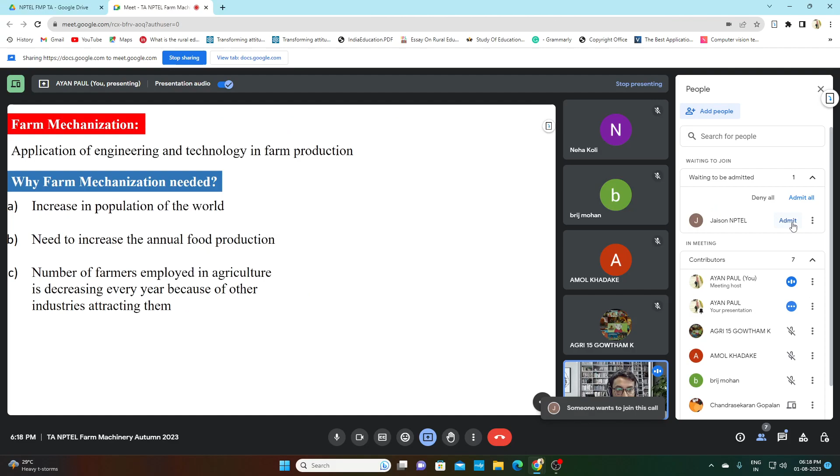So starting with this, there is an increase in population of the world. If you have read the week lectures, if I compare from 1951 to 2023, our population has increased about four folds. To feed this population, what we need is to increase our annual food production. More the people, more food we require to feed them.

So for that we mainly require farm mechanization. But you can say, if we require more food, we can still work it out without farm mechanization. So the answer to this is, you have seen there is an increase in population of the world, but if we compare the number of farmers employed in agriculture, the farmers are decreasing every year because other industries are attracting them.

Because agriculture tasks without any mechanization are very expensive in terms of hard work. This is a very hard working task without mechanization. So that is why we require farm mechanization. Therefore there is a need to increase crop production to feed the current population of the country, and for this we mainly require mechanization.

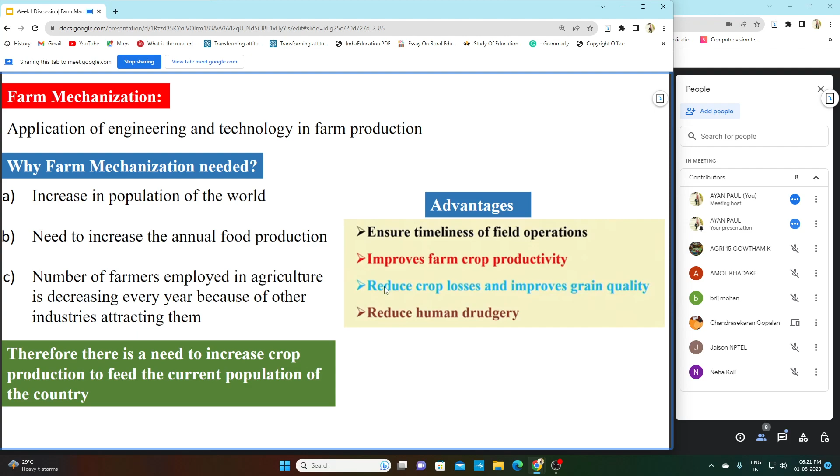Fourth is reduce human drudgery. As I was saying earlier, the number of farmers employed is decreasing. Why decreasing? Because it is very hard work on a farm. So to reduce human drudgery or tiredness, farm mechanization is very advantageous.

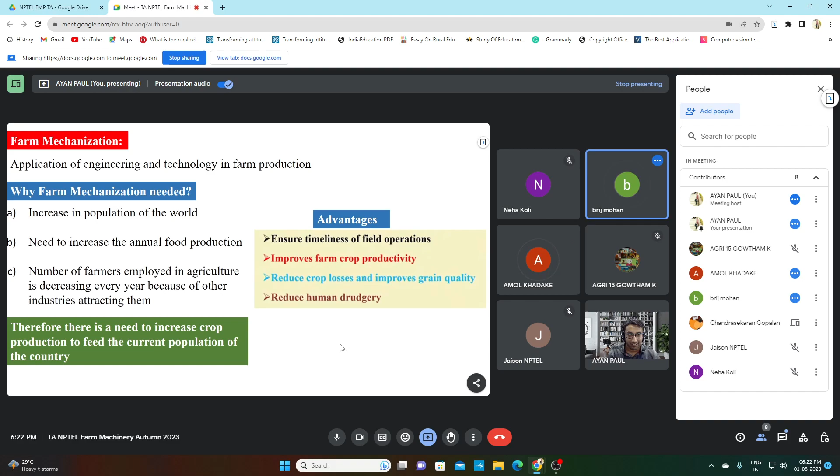So is this slide clear to you all? Hello. Yes, sir. Okay. Any query from this slide particularly? Any simple queries you have? Anything in mind? One thing I want to request is please make this session interactive. If you interact with me, then only I can understand your doubts well. Okay. Yeah, okay sir, clear, yes. Okay, very nice.

So let's move on to the second slide: farm power availability and grain productivity. This chart's x-axis shows the years and y-axis shows the data. There are two types of data: the blue line indicates power availability, and the orange line indicates productivity. You can see clearly that whenever the blue line takes an upward trend, the orange line also takes an upward trend. That clearly means there is a positive correlation between power availability, indicated by the blue line, and productivity, indicated by the orange line.

For more information, I want to draw your attention to the fact that in 2018-19 our farm power availability was 2.49 kilowatt per hectare, and it is expected to be 4 kilowatt per hectare by 2030. Now one main question I want to ask: can anyone tell me how this power availability is calculated? Can anyone unmute and try to tell how this power availability is calculated?

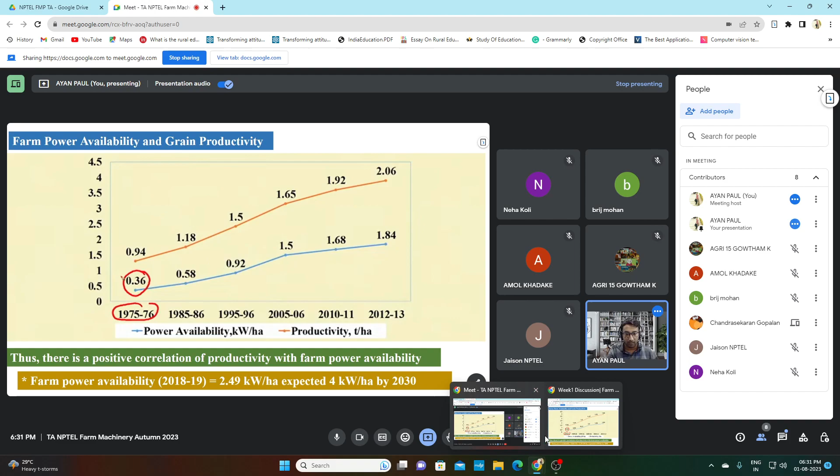So let me go back to my slide. Okay, 1 minute.

Okay. So what are the different farm machinery operations? This is a very important slide. In farm machinery, generally we break our farm machinery operations into 4 parts. One is land development, tillage and seedbed preparation. This is the primary operation, the first operation of our farm machinery, right?

Second is sowing and planting, meaning once we develop the field, our next task is to sow the seed or plant the seed. There's a difference between sowing and planting that I will tell you in the subsequent classes. Third is weeding, intercultivation and plant protection. When our plant is growing, we need to protect it from competition by weeds grown nearby, or from pests, insects, etc. This is known as the plant protection operation.

And the fourth one is the harvesting operation. When our fruits and cereal crops have attained the maturity stage, or physiological maturity stage, we do the harvesting operation. And after harvesting, we do the threshing operation to separate our grains from any husk or grasses, etc.

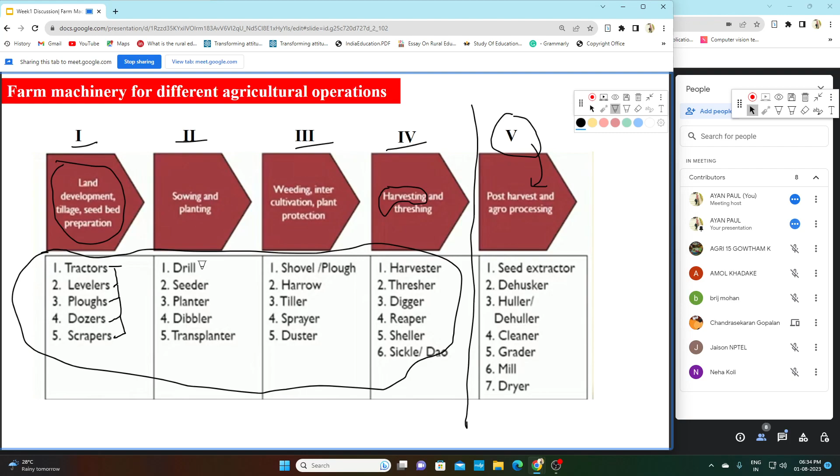For sowing and planting we use the seed drill, seeder, planter, dibbler, and transplanter. A seed drill is a machine used to sow the seeds. A planter is also used to sow seeds, but the difference is that with a seed drill we do not maintain plant to plant distance, while with a planter we accurately maintain plant to plant distance. A dibbler is a manual instrument used for precise planting, more precise than a planter.

And transplanter: for some crops we first raise plants in a nursery, and from the nursery we have to transplant them to the main field. For this the transplanter is used.

For plant protection we use a shovel or plow, a harrow, tiller, sprayer and duster. The sprayer is used for liquid application, while the duster is used for solid application, like powder or granular particles. This is the main difference between sprayer and duster.

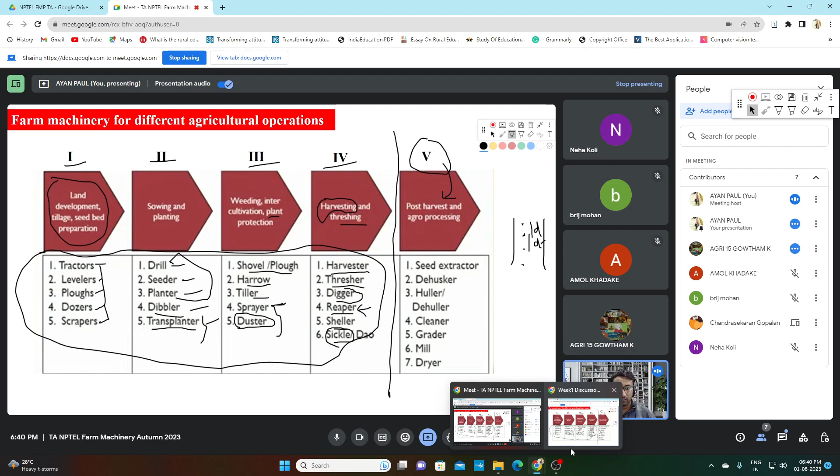This is one of the most important slides. I want to draw your attention to the four farm machinery operations. That will be asked to you again and again in any interview or any kind of thing. So please keep in mind these four operations of farm machinery. Okay, so let me go to the next slide.

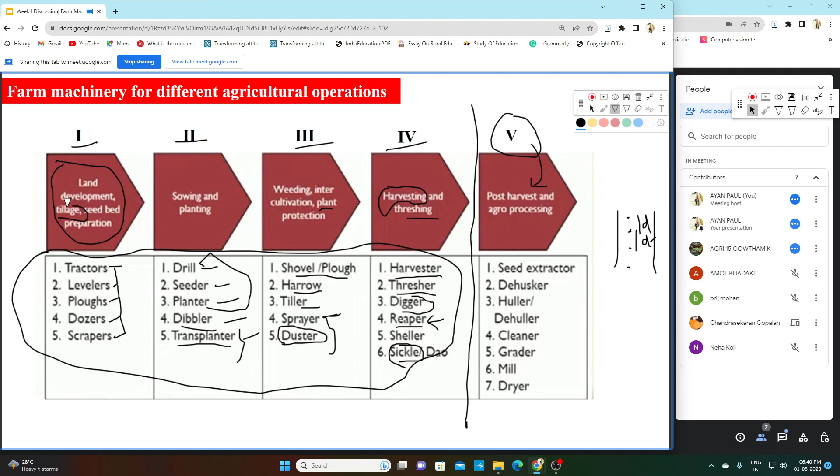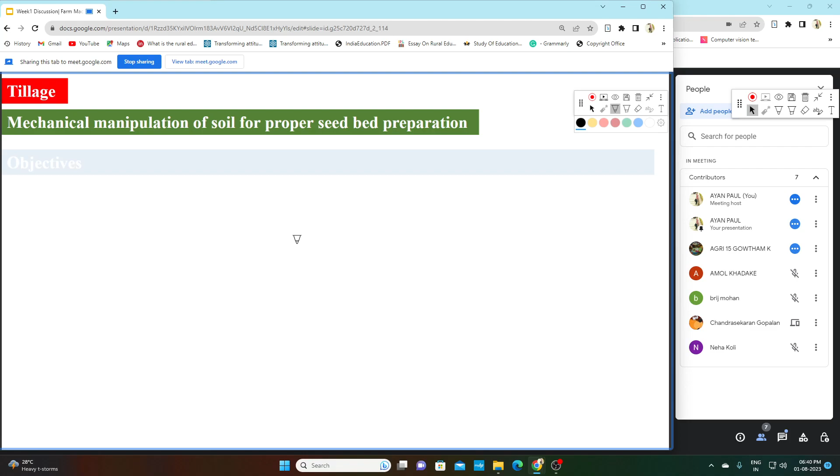So our first farm machinery operation is land development, or seed bed preparation, and we start with tillage. So what is tillage? Tillage is mechanical manipulation of soil for proper seed bed preparation. Before planting your seed, you have to mechanically manipulate the soil. That operation is known as tillage. What are the objectives of tillage? Basically, we do tillage to develop a desirable soil structure for seed bed or root bed.

Any barren land, if kept for many days, will develop a hard pan over it. When the hard pan is developed, without tillage, if you sow the seed, the root will not be able to penetrate well into the soil. So to open our soil a bit, we do tillage. Second is to control weeds or remove unwanted crop plants. Before tillage there can be unwanted crops lying in your field, so to remove them we do tillage.

Third is to manage plant residue. If any plant residue is left, we do tillage to control it. With tillage, the plant residue goes into the soil, and when we mix the soil, the nutrition value of the soil also increases. Then, to minimize soil erosion by following contour tillage, listing and proper placement of trash.

Now what happens is, agricultural land is very prone to soil erosion. Whenever the rain comes, it takes soil with it. So to manage that, we do seed bed preparation in such a way that it controls soil erosion. And the last one is to incorporate and mix fertilizer, pesticide or soil amendments into the soil.

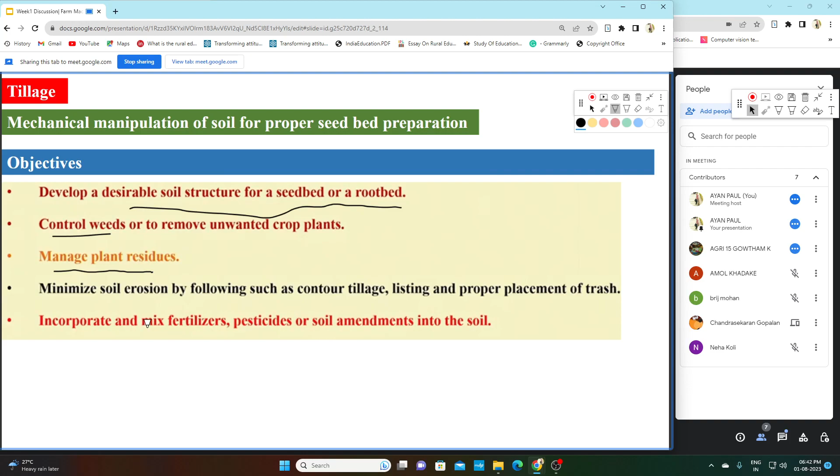If our soil is already too acidic or too basic, we have to add some fertilizers or amendments, and to mix the fertilizer properly with soil, tillage is very helpful. Okay, so this is the thing. Is this slide clear?

Tillage? Yes, sir. Okay. Any doubt regarding tillage?

So one question was there. Yes. About this topsoil: when we till, the topsoil goes down. What is required for the plant? Is topsoil required, or is the deep soil required? Yeah, both required. Topsoil also required.

Generally, for planting we do 15 to 20 centimeters, basically for most crops. Okay, it is 15 to 20 centimeters. So I think both soils are required, right? Topsoil and also the soil below that.

So what we do in tillage is destroy the hard pan that is created. We basically aerate the soil. When we do the digging operation or some other operation, that hard pan will be destroyed, and our roots will properly penetrate well into the soil. Okay.

Okay, sir. Okay. Any other doubt? Okay. So let me move.

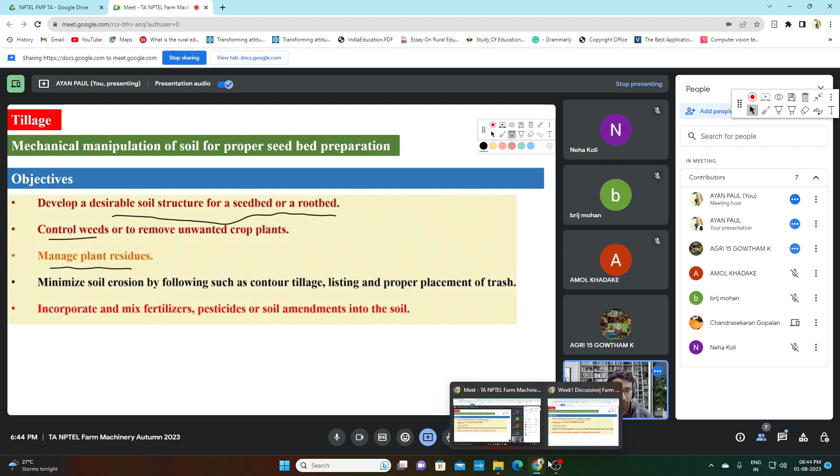Okay, so now what are the types of tillage? Basically there are two types of tillage. One is primary tillage and the other is secondary tillage. There is another type of tillage called conservation tillage. So let's see what the different types of tillage mean. So first is primary tillage.

Primary tillage constitutes the initial major soil working operation. So this is the main type of tillage. It is normally designed to reduce soil strength, cover plant residues, and rearrange aggregates. Whatever definition you have heard, this is the main type of tillage, primary tillage, the initial major soil working operation.

So these are the different tillage equipment. You can see this is a moldboard plow, this is a reversible moldboard plow, this is a disc plow, this is a chisel plow, and this is a subsoiler. Okay.

So is my voice audible? Yes, sir. Okay.

So the next type of tillage is secondary tillage. Secondary tillage is to create refined soil conditions following primary tillage. After primary tillage, we need our soil to be properly leveled. Without leveling, one seed might be at one depth and another seed at a different depth. That will basically affect the yield quality. So to prevent that, we properly refine the soil, or properly level the soil.

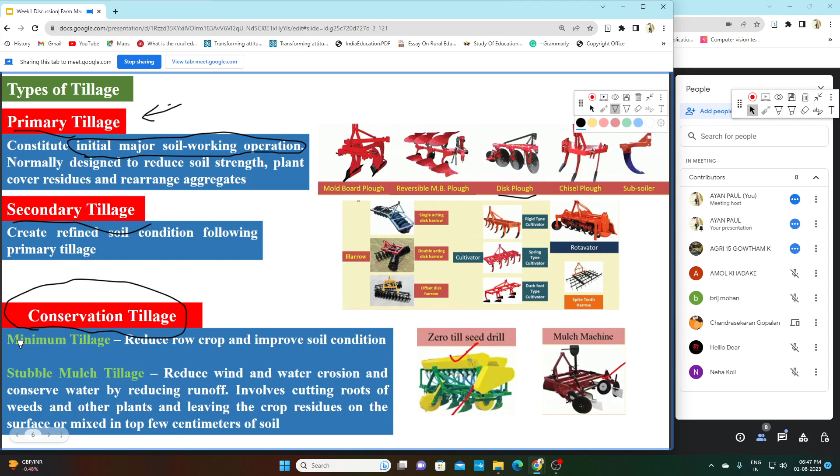And the third type of tillage is a special type known as conservation tillage. What if our seed bed is already in a good condition? There, the type of tillage we require is minimum tillage. In minimum tillage, we reduce row crop operations and improve soil conditions. So if our soil is already in a good condition, we do not require primary or secondary tillage. We can go with conservation tillage.

There is another type of tillage known as stubble mulch tillage. I already told you there might be a problem of wind erosion or water erosion, and the soil might be taken by wind or water. So to protect this, we do stubble mulch tillage. The plants that were already in the field, we basically mix those plants into the top few centimeters of soil, so that the strength of the soil increases. So this is the purpose of conservation tillage.

You can see these are the two popular equipment used for conservation tillage. One is the zero till seed drill, and the other is the mulch machine. The zero till seed drill is basically used for minimum tillage, and the mulch machine mixes the mulch, or the crop residues already in the soil, with the soil. This is the equipment for stubble mulch tillage. So is the slide clear to all of you? Primary tillage, secondary tillage, and conservation tillage.

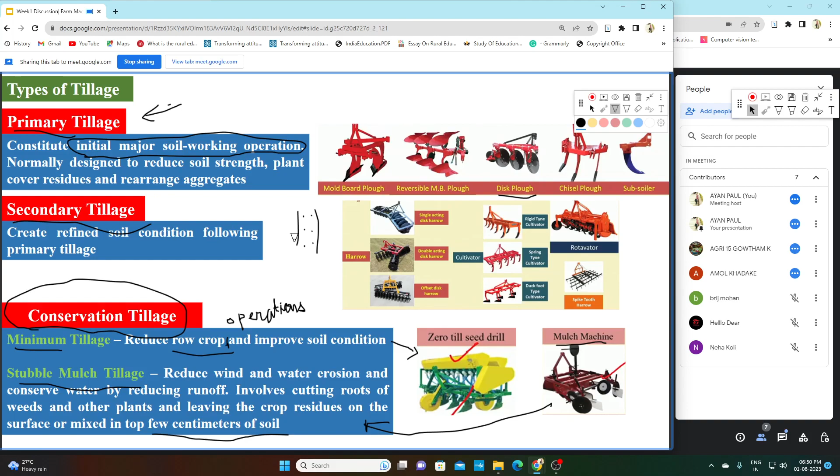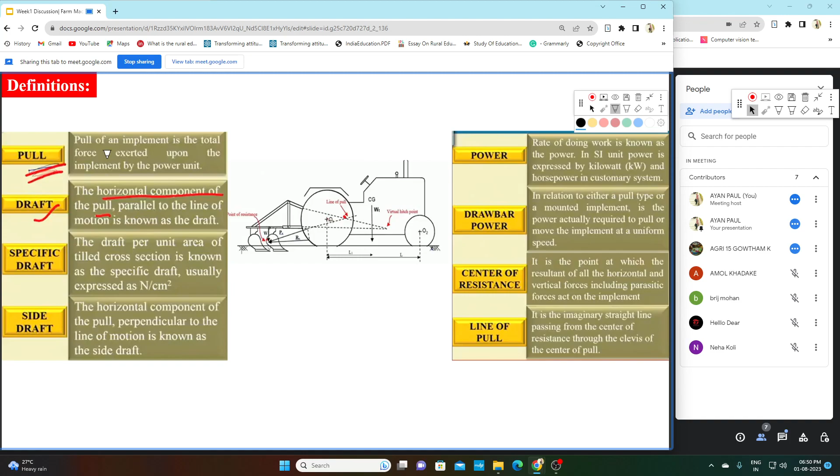Okay, so let me move to the next slide. So yeah, for any farm machinery operation, what you require is a tractor, okay. So there are some definitions related to implements and tractors. So first is pull. You can see this first part is the tractor, and this second part is your implement, okay. First part is tractor, second part is implement.

So what is this pull of an implement? It is the total force exerted upon the implement by the power unit or the tractor, okay. So the force that is exerted by this power unit to pull this implement is known as pull. In farm machinery operation, we will call it pull. Now what is draft? Draft is the horizontal component of pull parallel to the line of motion.

So what happens is, this may be your tractor, okay. It is not necessary that your implement is always in a straight position. Your implement can be tilted to some position also. So this force exerted is known as pull. So what is draft? If we take the component in a horizontal direction, that is known as draft. This is the pull, and this is the draft.

Now specific draft: draft per unit tilled cross section area. So whenever the implement is pulled, it has some draft, okay. So if we divide the draft by the tilled cross section area, we will get the specific draft. Now what is side draft?

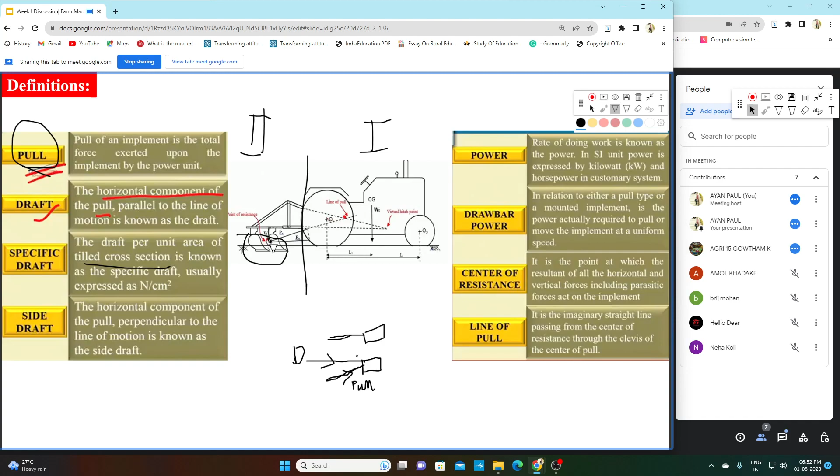Which area? Yeah, area. So you can see this is your implement, a moldboard implement. So when the moldboard is pulled, there will be some tillage, and this is known as tilled soil. This is one strip, and this is the second strip. Two tools, so two strips. So this is the tilled soil.

So when you pull your equipment, it will be tilled in the horizontal direction. I am showing it in the vertical direction, but it is actually in the horizontal direction. So when you divide this draft by this tilled area, that is known as specific draft. Okay. Clear, sir, clear. Thank you.

Now what is side draft? In the case of draft, I have told you it is the horizontal component of the pull. But see, there are two planes: one is the vertical plane and another is the horizontal plane. In the horizontal plane also, it may not be in a straight line with the tractor. So in the horizontal plane, it can be somewhere here also.

So side draft is perpendicular to the line of motion. If this is your pull, denoted by P, taking this pull in the horizontal plane, this is your draft. The side draft is perpendicular; this is your side draft, SD. So this is your pull, this is your draft, and this is your side draft. The force that is perpendicular to this draft is known as side draft. Is this clear? What is pull, what is draft, what is side draft?

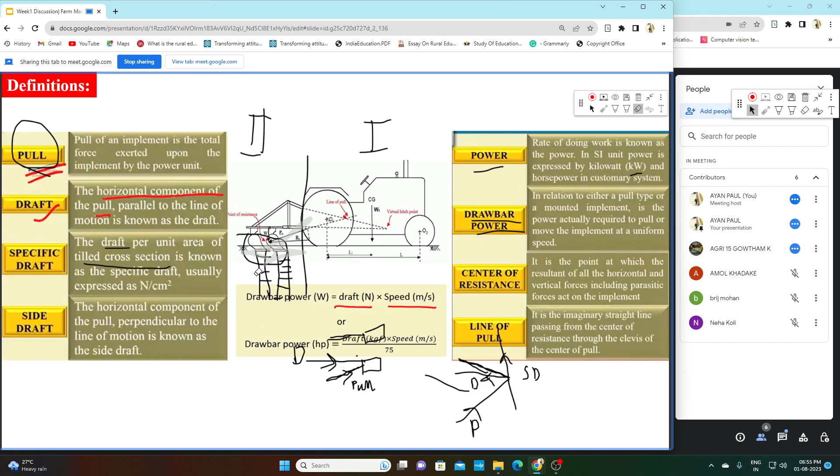Yes, sir. Okay. Now power, everyone knows what power is. It is the rate of doing work, and I have already told you its unit is kilowatt. And regarding drawbar power, let me erase it. So drawbar power is nothing but draft into the speed. We know that power is equal to force into velocity. So drawbar power will be equal to the draft of the implement into the speed at which the implement is traveling.

Now center of resistance. It is the point at which the resultant of horizontal and vertical forces, including parasitic forces, acts on the implement. There are two kinds of forces. One is useful force, that is required to cut the soil or do the useful operation. And there is parasitic force, like friction or any such forces that come due to our useful force; that is known as parasitic force.

So center of resistance is the point of resultant of this horizontal and vertical forces, including the useful as well as this parasitic force. Okay, and last is line of pull. It is the imaginary straight line passing from the center of resistance to the clevis of the center of pull. So you can see in the diagram, this is the line of pull.

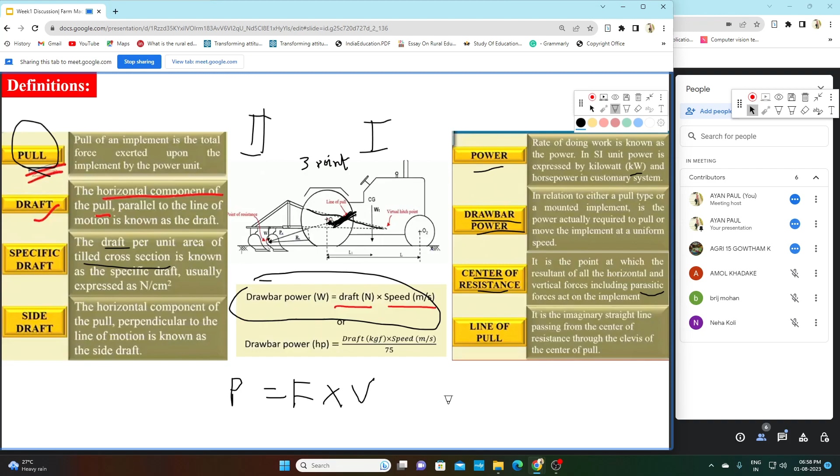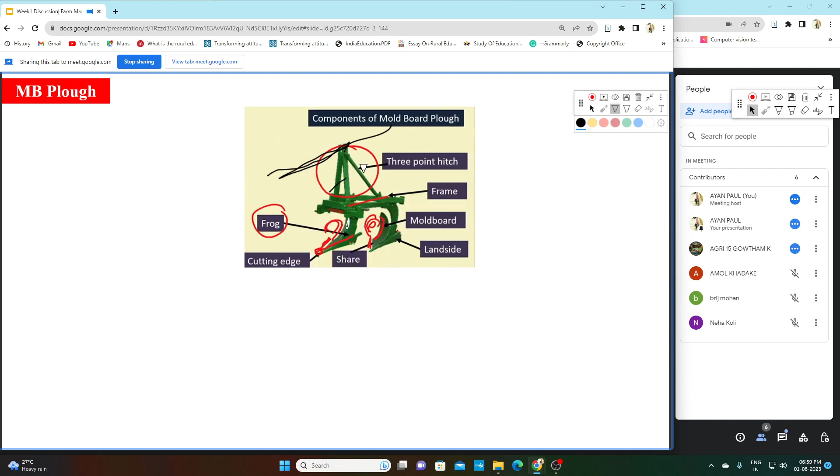Okay. So let me move to this MB plow. So this is an MB plow, mold board plow. These are the different components of this MB plow. So yeah, 3 point hitch. Someone was telling only this top link, but no, the top link as well as these two bottom links are also connected in a 3 point hitch. So that is why the line of the pull is coming like this. That is the pull of the tractor, there will be a center of resistance here, and this is your line of pull.

So this is a 3 point hitch, this is a frame, these are the mold board that is used for this plowing operation. This is a landside that will take the side thrust of the mold board, and in the mold board there is a share and there is a cutting edge. So the cutting edge first enters the soil, and what is the purpose of share? The share turns the soil. Plowing is the initial soil working operation. So to break that hard pan, we do tillage in such a way that the soil overturns. This is also known as pulverizing operation. So the soil overturns, and that function is done by share.

And frog is an element that connects this mold board with this frame and hinge. This is the function of the frog. So this is mold board plow, and function is cutting the furrow slice, then lifting the soil. The share does the lifting, the share also does the turning operation, and pulverizing the soil. Pulverizing the soil means breaking the hard clods, to decrease the diameter of the soil clods, in order to have a better penetration in the soil. So this MB plow also does the pulverizing of the soil.

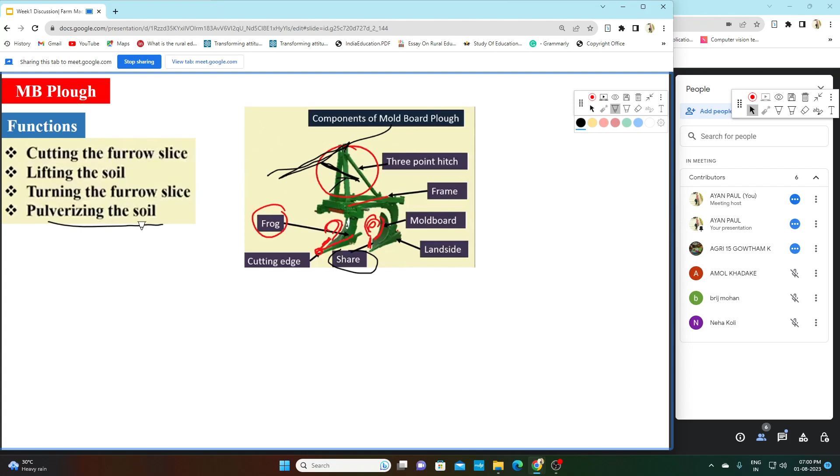Now types of mold board. This type of mold board you are seeing here is one way mold board plow. There is another type known as two-way mold board plow. Here you can see the turning operation is at one side. If the turning of the soil is on both sides, that is known as two-way mold board plow or reversible mold board plow.

Now there are different types of plow bottom used for different purposes. The general purpose bottom mold board plow is mainly used for a wide range of operations. But the sod or breaker type of mold board plow, you can see by the shape, is a long and low mold board. It is used to invert the furrow slice with a minimum breakup. So in this sod or breaker type of mold board plow, basically this turning operation will be more.

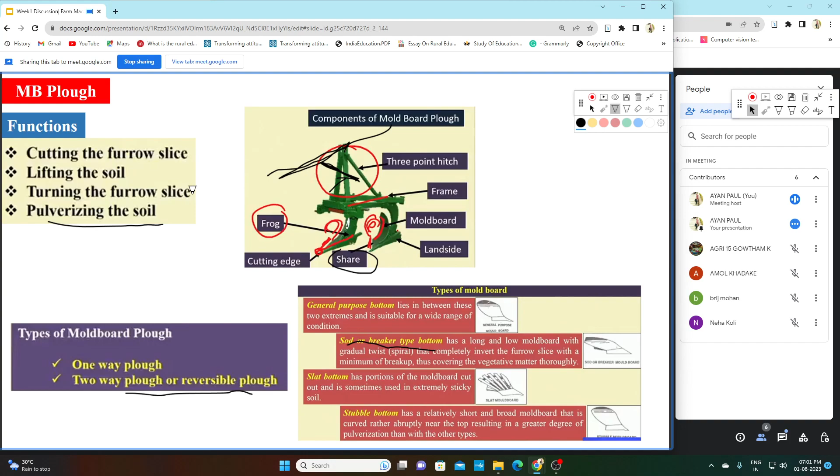This turning operation will be more, and there will be a decreased pulverizing operation. So this is the purpose of this type of bottom. Now this slat bottom has a portion of the moldboard cut and is sometimes used for extremely sticky soil. If the soil is very sticky and it is sticking to the moldboard plow, for that purpose we use this slat bottom moldboard plow.

Now the stubble bottom moldboard plow is, you can say, opposite to the sod bottom moldboard plow. It is a relatively short and broad moldboard plow, and it has a greater degree of pulverization than other types. So these two moldboards you should keep in mind for your exam or any interview purpose. One is the sod or breaker type of moldboard plow, and another is the stubble bottom. The sod does much more inversion than pulverization, and the stubble bottom does greater pulverization and lesser inversion.

Okay, so is this slide clear, the difference between the sod or breaker type of moldboard plow and the stubble bottom moldboard plow? Is this clear? Yes, sir. Okay, so again I am repeating what the moldboard plow does.

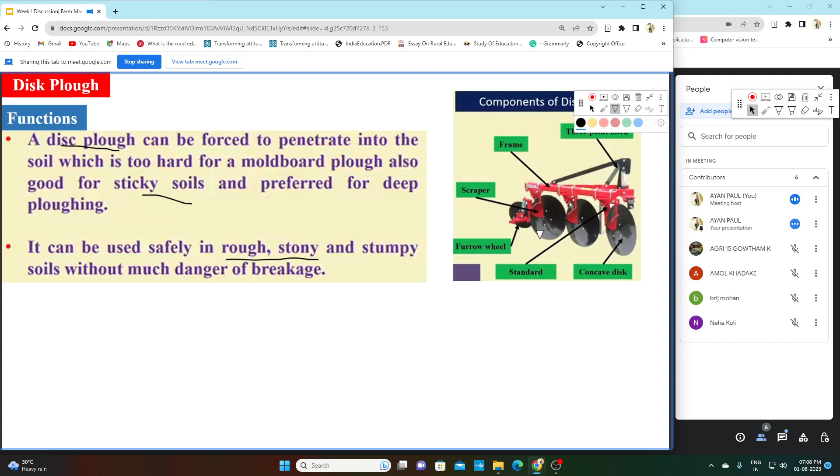Second, we can also use this in rough and stony soils, because the disc is connected by this standard, and there is some type of spring attached in this standard. So when we are operating in rough and stony soil, the shock absorbed by this type of implement is less. So this is the purpose that we move from moldboard plow to this disc plow.

Okay, now standard disc plow. As I have already told, this is the standard disc plow. For this standard disc plow there are two types of angle: one is disc angle and another is tilt angle. This is the direction of travel of the tractor, and the disc will be at a certain angle to the direction of travel. The angle between the direction of travel and the disc is known as disc angle. Another angle is known as tilt angle: with vertical, the disc is tilted to some angle, that is known as tilt angle.

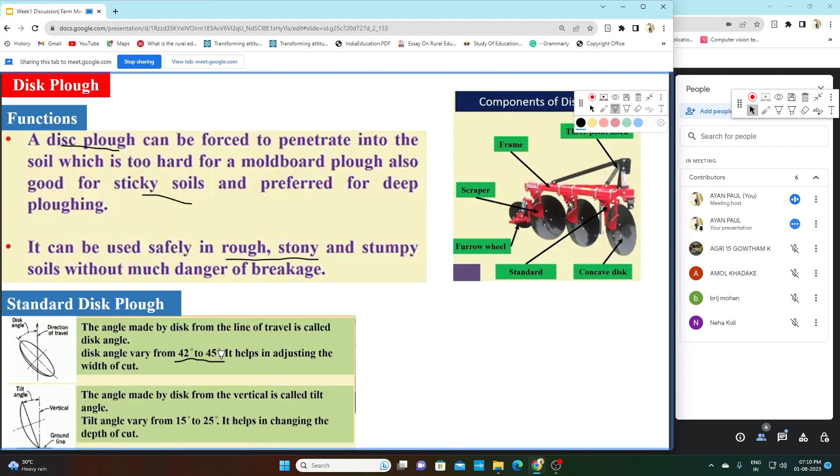So again I am repeating, in this standard disc plow, two types of angle we need to focus on. One is disc angle and the other is tilt angle. Disc angle is the angle that the disc is making with the direction of travel, and tilt angle is the angle that the disc is making with the vertical. This question is very common. Generally for disc plow, the disc angle varies from 42 to 45 degrees, whereas the tilt angle varies from 15 to 25 degrees.

So again I am repeating, there are two types of disc plow. One that I have already explained, that is standard disc plow. Second is vertical disc plow. In case of vertical disc plow, the tilt angle is 0 degrees, but in case of standard disc plow, the tilt angle is 15 to 25 degrees. Okay, so is this clear?

Yes, sir. But vertical disc plow is used in sandy soil areas, where the stickiness action does not come much into action. And second, where the force to penetrate the soil is less, there we use vertical disc plow. Okay, so any question in this slide?

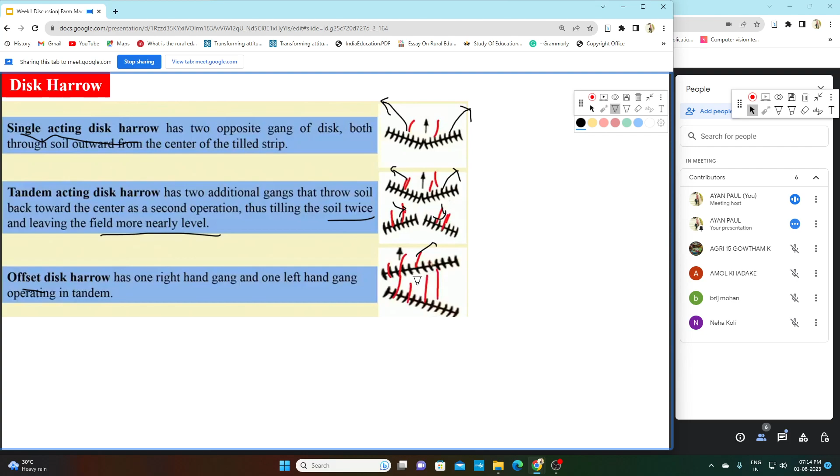The third type of disc harrow is known as offset disc harrow. This is also similar to the double acting disc harrow; the only difference is that in tandem disc harrow, for one set of gang action, we are using two gangs, but in offset disc harrow, for one set of action, we are using only one gang. One gang for throwing the soil outside, and the second gang for throwing the soil inwards. So these are the three types. So is this clear?

Hello, is this clear? Yes, sir.

Okay. So there is an angle that is used for this type of harrow, the gang angle. Sir, one doubt: what is the gang of discs? Yeah, gang of discs. You will understand this from this diagram. You can see these are the discs. These are the discs, you can see clearly, right? Okay, yeah, you can see the discs clearly.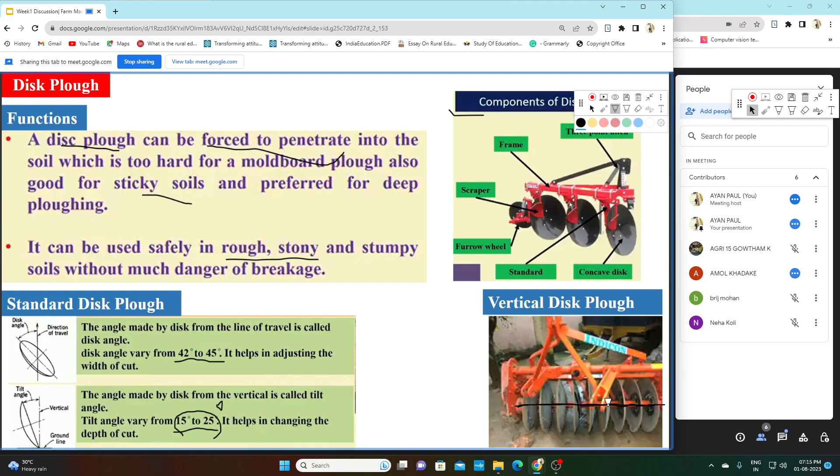The pipe, or the thing that is attaching all the discs, this red thing, that is attaching all the discs, that is known as the gang. Okay, so this is the thing. So the angle that the axis of the gang makes with the line perpendicular to the motion. You can see this is the gang angle for this disc. This is the gang angle, right?

And this is your direction of motion. Okay, so this angle, we can say alpha, this is your gang angle. The angle the gang is making with the line perpendicular to the direction of motion. So this is your direction of motion, and this is the perpendicular line to the direction of motion, and the angle that this gang is making with this perpendicular line is known as your gang angle. Okay, so is this clear? Is the gang angle clear?

Yes, sir. Okay. So you can see here also, in this diagram, this is your direction of motion, where it is hitched. And this is your perpendicular line, and the angle that the gang axis is making with the line perpendicular to the direction of motion is known as the gang angle. It is denoted by alpha, and normally the gang angle is between 30 to 35 degrees. Okay, is this clear?

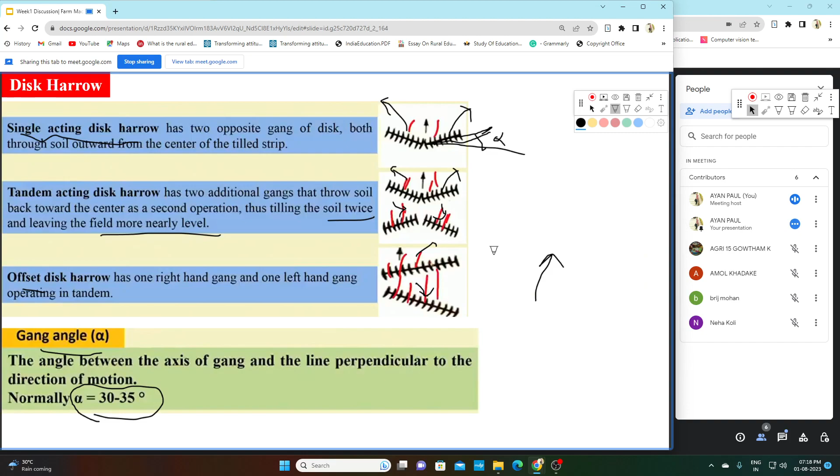The other equipment that I have shown, the disc harrow, the disc plow and the moldboard plow, are passive tillage equipment. Passive tillage equipment means your tractor is not directly giving power to the equipment for cutting. Your tractor is not directly giving power, so that is why this type of equipment is known as passive equipment.

But this equipment that I am discussing now, the rotavator, is an active tillage equipment. For these blades to be in motion, we require power directly from the tractor PTO. That is why this type of equipment is known as active tillage equipment. And this is the universal shaft. We connect this universal shaft with the tractor PTO, and the power goes from the tractor PTO to this universal shaft, and from this universal shaft there is a chain gear reduction.

Actually, the RPM of the tractor PTO is 540 RPM or 1000 RPM; these two types of RPM are there. This RPM is very high for these blades to rotate, so we have to do some reduction in speed. For this reduction in speed, we use this chain gear drive.

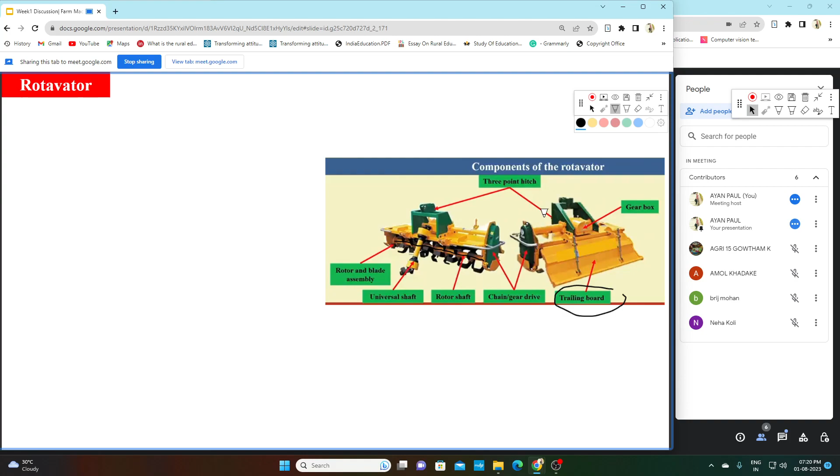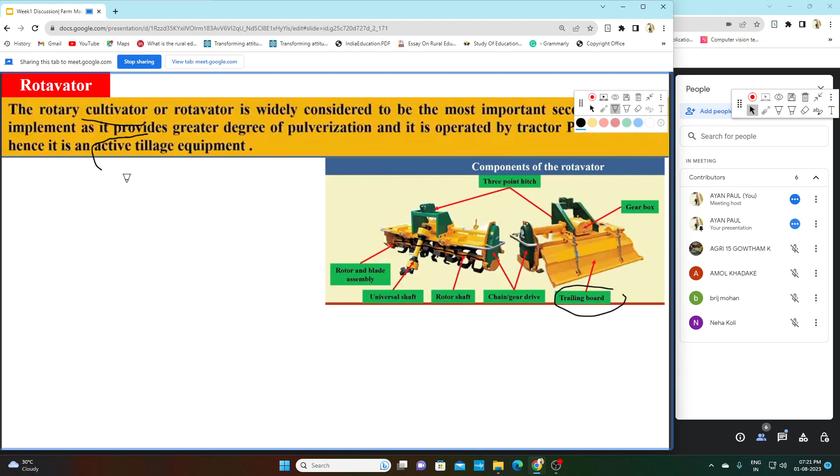Okay, so for the soil to be properly leveled, we use this trailing board. So these are the components of the rotavator. Rotavator is also known as rotary cultivator. It is widely considered the most important implement, as it provides a greater degree of pulverization. It is operated by tractor PTO. That is why it is called an active tillage implement. So that is what I told you first, that this is an active tillage equipment.

Now the question that always comes when we are discussing rotavator is the types of blades used for this rotavator. Basically there are three types of blades used for rotavator: L type blade, twisted blade, and straight blade. L type blade works well in trashy conditions, where there is more grass or more plant residue. It does more effective inversion operation, cutting weeds or turning soil, but it does not pulverize the soil much.

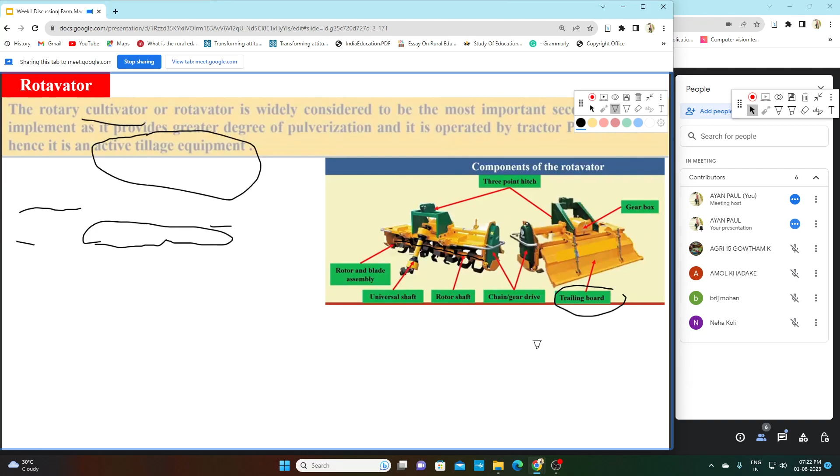Like in the case of the moldboard plow I explained, the sod or breaker type does the inversion operation well but not the pulverization. Similarly, the L type of blade does the inversion operation well, but does less pulverization.

Second is the twisted or curved blade. It is suitable where we require deep tillage, so there we use this twisted or curved blade. It is also suitable for orchards. In case of orchards, we generally require more depth to sow the seed, so we use this twisted blade.

Third is the straight blade. It is employed in mulchers, where we require more cutting operation, or where we want the weeds to go into the soil for conservation of moisture. Straight blade has very less depth of tillage, as well as very less pulverization. So this is the thing.

Any doubt in rotavator? I have one question: is there any drawback of rotavator? First, you need tractor PTO power, so that is the major drawback. Others do not require tractor PTO power. That is the only challenge of active tillage implements over passive tillage implements. But PTO is there in all tractors anyway, so there is no issue as such. But any drawback from the point of view of sowing? PTO is not required to run the tractor, right?

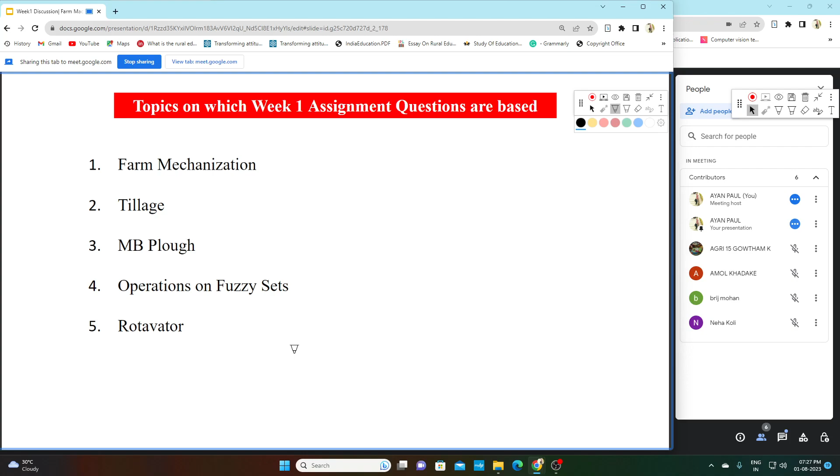So my request to everyone is to engage more. I will first display the question and if you know, you can answer in the chat section. If you don't know, you can write your guesses in the chat section. Okay, is that fine? Okay, sir.

Okay. So first question: the diameter in millimeter and speed in rpm of the PTO shaft having 21 splines are: option A, 30 millimeter and 540 rpm; B, 30 millimeter and 1000 rpm; C, 45 millimeter and 540 rpm; and D, 35 millimeter and 1000 rpm. So any guesses? You can write in chat or open your mic and speak. Any guesses for this?

35 and 1000. Yeah, can you please repeat? Which option? D, option D, D for Delhi. Okay. D. Any other option? I want everyone to guess at least. You can guess and write your option in the chat section. A for apple, 30 and 540. Okay. So A and D. Any other guesses?

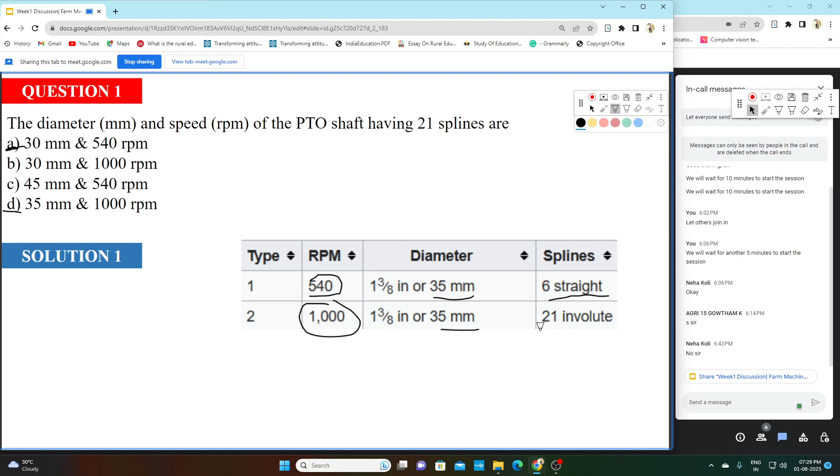Okay, so you can see this is the chart for your RPM, splines and diameter. Basically tractor PTO comes in two forms, one at 540 RPM and one at 1000 RPM. For both these RPMs, the diameter is 35 millimeter. For 540 RPM, 6 straight splines are there, and for 1000 RPM, 21 involute splines are there.

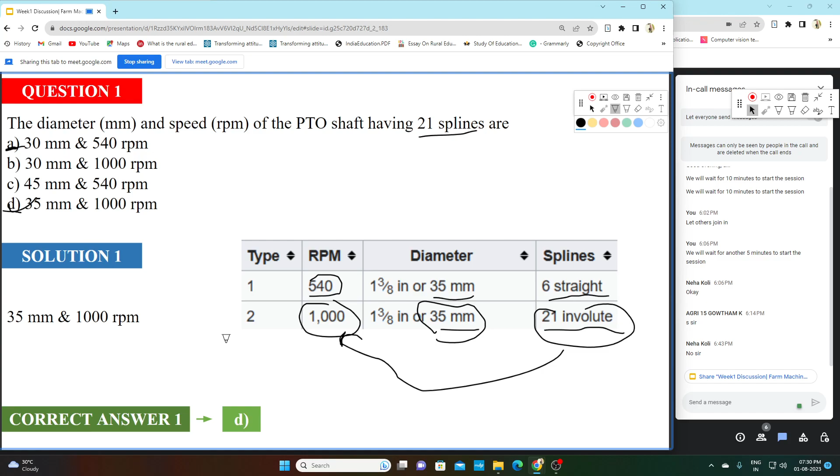Here it is asked 21 splines. So for 21 splines, the rpm will be 1000 rpm and 35 millimeter diameter. So your answer will be D. Okay, so is this clear? Okay, so next question.

The primary tillage implement suitable for plowing in stony and stumpy soil condition is: A, MB plow; B, reversible MB plow; C, disc plow; and D, none of the above. This theory I have already discussed, so I want everyone to guess or answer it. MB plow. Okay, anyone else? Disc plow, C. Anyone else? I was thinking about both A and B. Reversible also will do the same thing. Okay, so A and B.

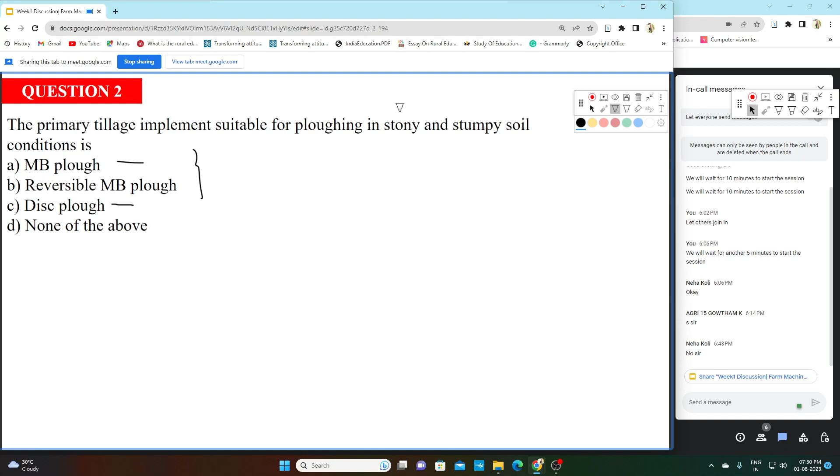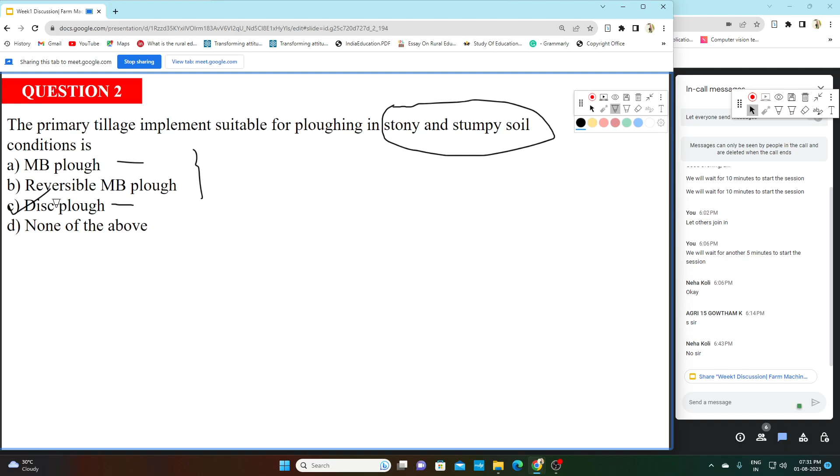So see, here it is mentioned stony and stumpy soil. When I was discussing the theory, I told you in stony and stumpy soil we use disc plow. So the correct answer is C, disc plow. Disc plow can be forced to penetrate into the soil. Where it is difficult to penetrate, we move from MB plow to disc plow, as well as in sticky soil conditions. And second, in rough stony and stumpy soil conditions, we use the disc plow. So your answer will be C.

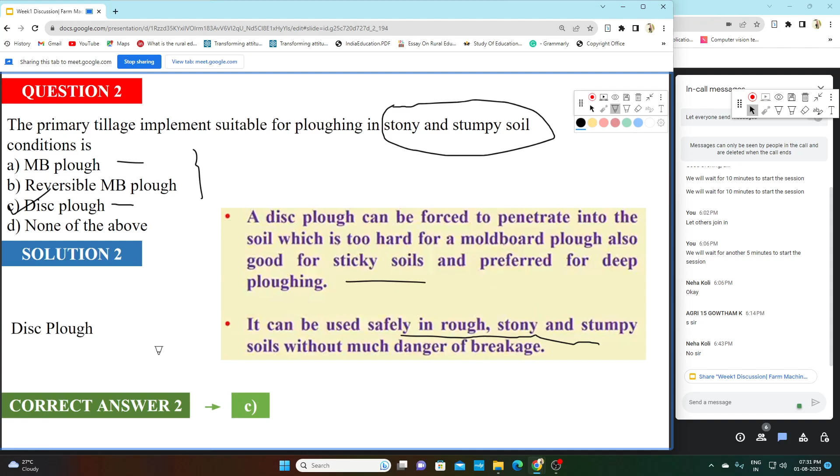So the MB plow may break in a stony area. Yeah, exactly. Okay, got it. So move on to the next question.

Which type of blade is most preferable for operating the rotavator in trashy condition? Again, a question that I have already discussed in theory. I want you all to answer if you can. It's L type. Any other guesses? Neha is telling A. Okay. Any other guesses?

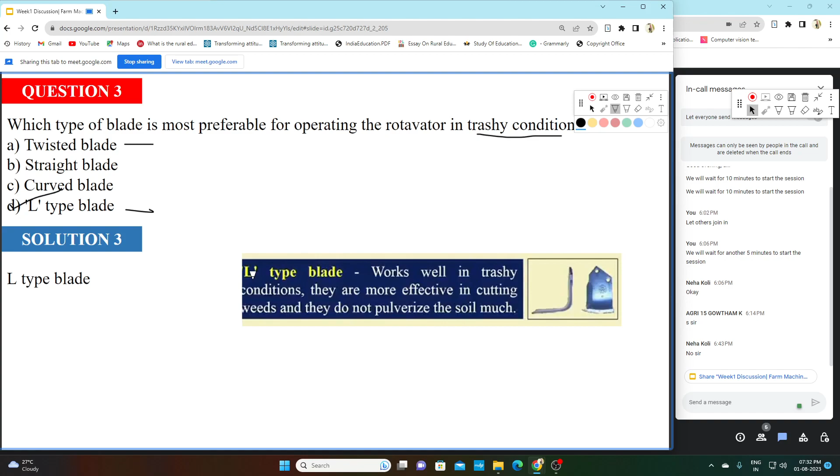Okay, so Neha, I have already discussed that in case of trashy soil condition, we have to cut the roots. The twisted blade is used for more soil depth, but to cut the trashy things, we need the L type of blade. So the answer will be D. In trashy condition, we use the L type of blade. So move on to the next question.

In a disc harrow, the angle between the axis of the gang and the line perpendicular to the direction of motion is known as? Gang angle. Yeah, gang angle. Any other guesses? Gang angle, C. Okay, not the disc angle, right?

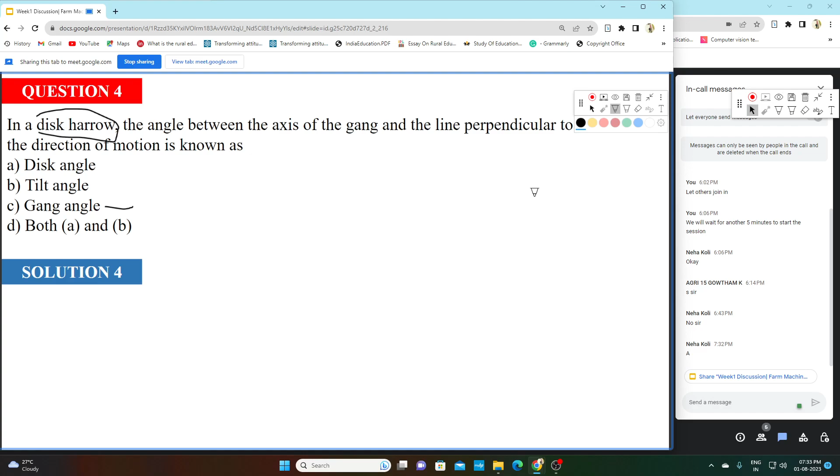Okay, so disc harrow. Whenever we are talking about disc harrow, we are talking about the gang and the angle that the axis of the gang is making to the line perpendicular to it. That angle is known as gang angle. The theory I have already discussed, and it is normally kept at 30 to 35 degrees. So C is the correct answer.

Okay. So up to this, everything is clear, right? Any question, any doubt? The four questions I have discussed. Any doubt? No, sir. Okay. So let's move on to the numerical problem. An offset disc harrow with... Okay, Neha is telling no. Okay. So no doubt. Yeah.

So let me start this question 5. An offset disc harrow with 12 discs. So number of discs are 12. The diameter of disc is 530 millimeter, and disc spacing, let me hide this, disc spacing is 180 millimeter. It is operating in a field. If the gang angle is 30 degrees, then the total working width of the disc harrow is what?

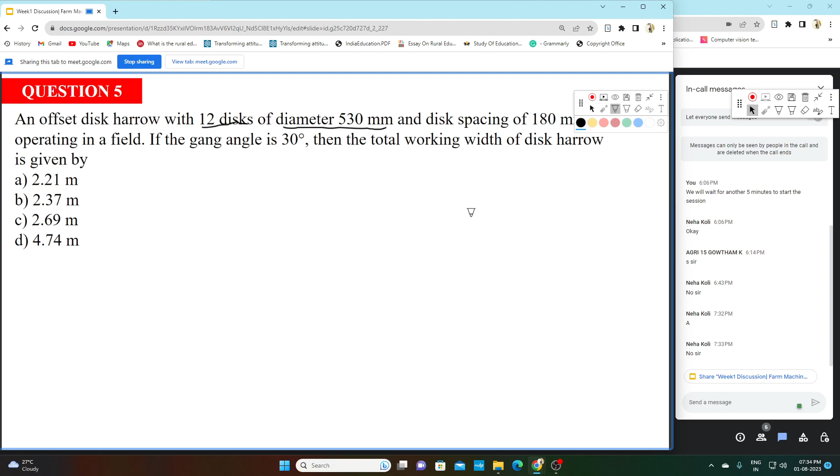So you know this formula. Anyone who has seen the videos knows the formula. What is the formula for this? Okay, no problem. So let me tell you the formula. I have told you there are three types of disc harrows, right? So for single action disc harrow, your working width is given by this formula: W = (0.95 N S + 0.3 D) / 1000, where W is the width in meter, N is the number of discs, S is the disc spacing, and D is the diameter of the disc in millimeter.

Okay, so this is the formula for single action disc harrow. Similarly, for tandem action or double acting disc harrow, this is your formula: 0.3 is replaced by 1.2, and for offset disc harrow, this 0.3 is replaced by 0.6. So in the question it is asking for what type of disc harrow? Offset type of disc harrow. So we have to look into this formula.

Okay, so what has been given in the question? We have been given number of discs, that is N. So 0.95 into 12. Have we got the spacing? Yes, the spacing is also given, that is 180 mm. So 0.95 into 12 into 180 mm plus 0.6 into D. D is your diameter of the disc, which is given as 530 millimeter. So when you apply this formula, 0.95 N S plus 0.6 D divided by 1000, you will get this answer, 2.37 meter. 2.37 meter is your option B. So option B is your right answer.

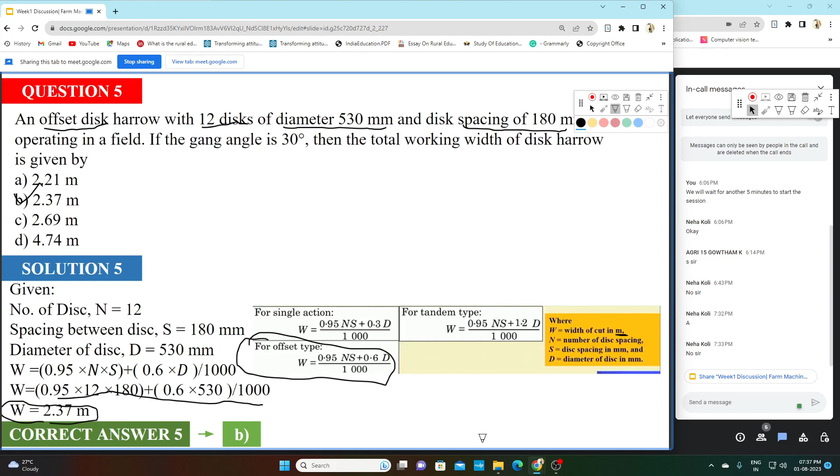So is this clear? Clear, sir. Neha, is this clear? Yes, sir. Okay, so let's move to the next question.

The main purpose of landside of a tractor drawn moldboard plow is to: option A, lift and turn the furrow slice; option B, make horizontal cut of the soil slice; C, resist the side pressure exerted by the furrow slice; and D, none of the above. So any guesses for this? C option. A. Yeah, C option, someone is telling A. So we are left with B and D. I don't think it will be D. So okay, between A and C.

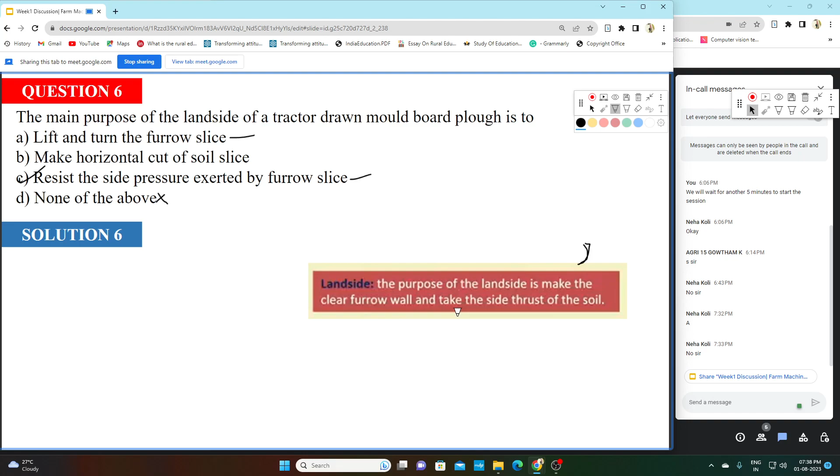Okay. So lift and turn the furrow slice: whenever I was talking about the moldboard, the share does this lift and turn of the furrow slice. But resisting the soil side pressure exerted, that is done by the landside. So landside does this, C option. You can see the purpose of landside is to make a clear furrow wall. It also levels the furrow wall, you can say, and takes the side thrust of the soil.

Okay, so C is your correct answer. Okay, so if we can go back to the diagram, it will be more clear. So yeah, this you can see, this is your landside. Okay, so landside is at the side. It will do two things. One is it will make a clear furrow wall, and second is it will take the side force.

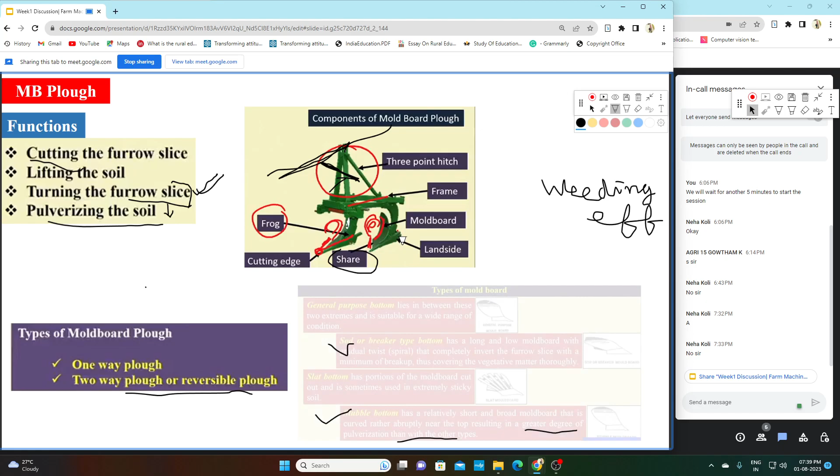Your inversion and lifting operation, that will be done by this part, the share part. Okay, landside will take the side thrust. So option C is your correct answer. Okay, so is this clear?

Yes, sir. Okay. So again a numerical: a rotavator has 9 discs and is operating at a forward speed of 5 km per hour. Okay, let me hide this toolbar. If each disc has 4 blades in one plane making 250 revolutions per minute, then the bite length of the rotavator is given by? So do you know the formula for bite length? Anyone? Formula for bite length?

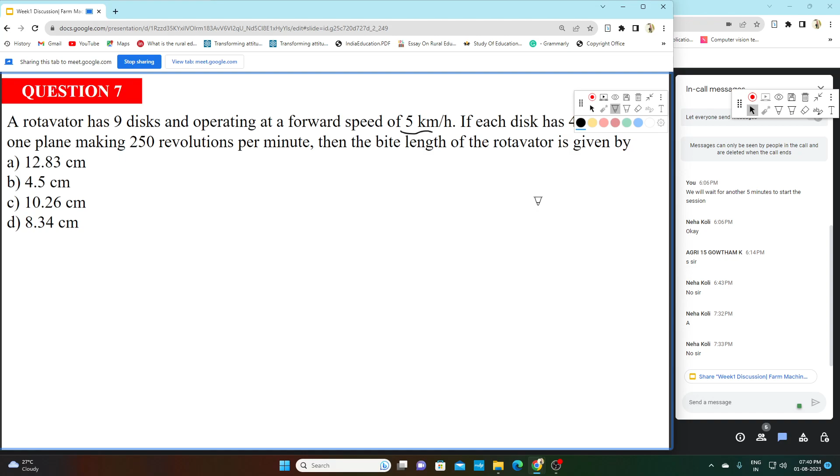Okay, so let me tell you the bite length or the tilling pitch. What is bite length? Bite length is defined as the amount of travel per cut, how much the rotavator is traveling per cut. And that is given by this formula: L equals V into 60 by N into Z. V is your forward speed, N is your RPM, Z is your number of blades acting in one plane. So if you know the formula, you can directly put your values in it and get the answer.

Okay, so V is the speed. Speed is given 5 km per hour. The unit here must be in the metric system, so kilometer per hour we have to convert into meter per second. So 5 into 1000 divided by 3600. When you do this, you will get your speed in meter per second, and that will be equal to 1.39 meter per second. Okay, for each disc 4 blades are acting in one plane.

So Z is 4, already given. Making 250 revolutions per minute, so RPM is also given, that is 250. So when you put V as 1.39: 1.39 into 60 divided by 250 into 4. When you do this, you will get the answer 0.0834 meter, that is 8.34 centimeter. So your answer will be D. Okay. So is this clear?

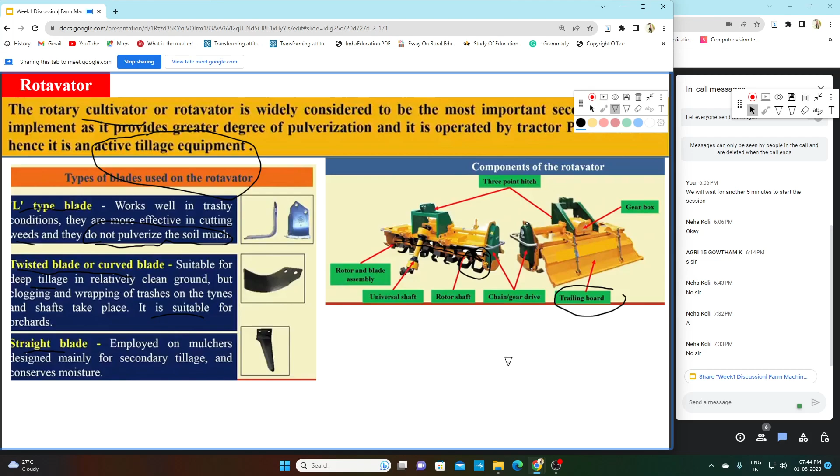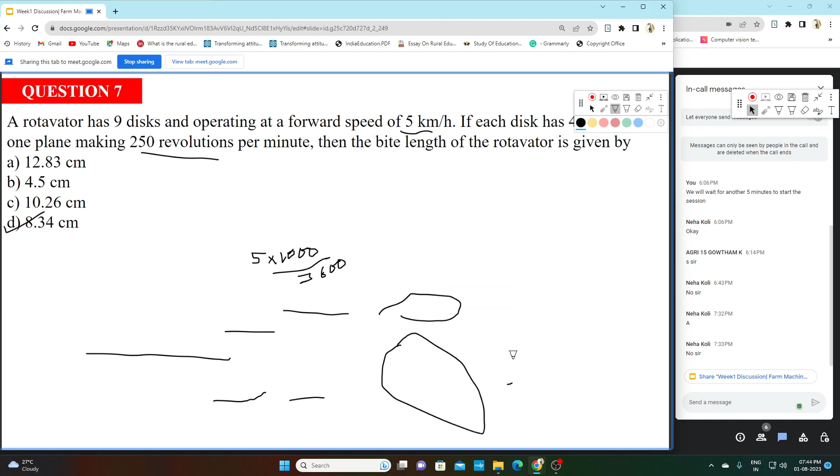Bite length is what? Again I am telling, bite length is the distance traveled by your rotavator in one cut. That is your bite length. Again, bite length is defined as amount of travel per cut.

We are talking about distance, how much distance the rotavator travels per cut. So it does not necessarily mean how much soil will be cut. Travel will be the only thing we're talking about. That is why there is no factor of straight blade, L type of blade or twisted blade.

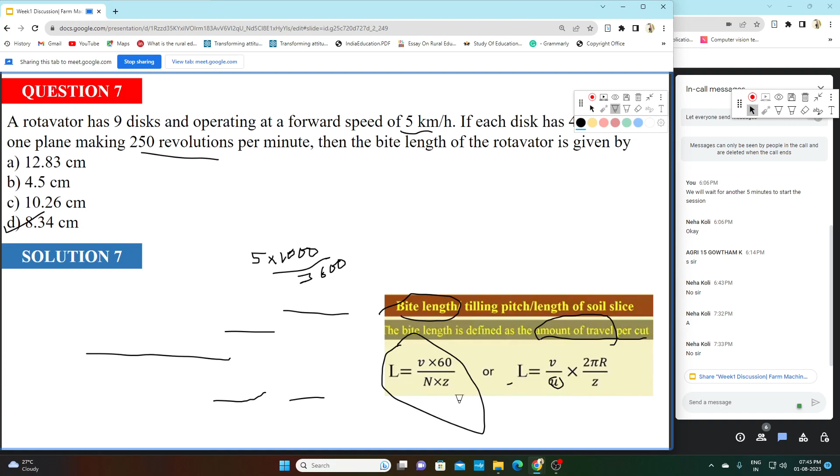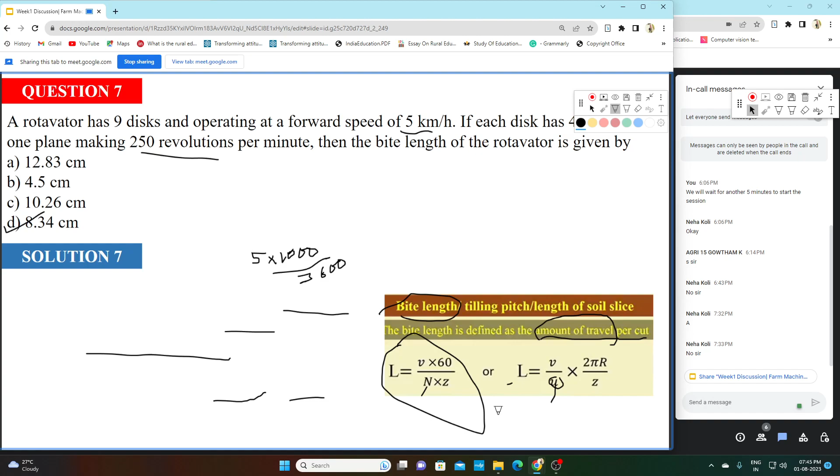This is the formula. Here, n is the revolution that the disk is making, right? So in place of n, if we are expressing our speed in meter per second, we can directly call it omega. This unit is rpm, this unit is meter per second. Clear? So this is the thing.

Now question number 8: the rolling resistance and frictional forces that act upon stabilizing surfaces such as landside, etc. are known as: A, draft forces; B, useful soil forces; C, parasitic soil forces; and D, none of the above. So any guesses for this? C, parasitic. Yeah, any other guesses?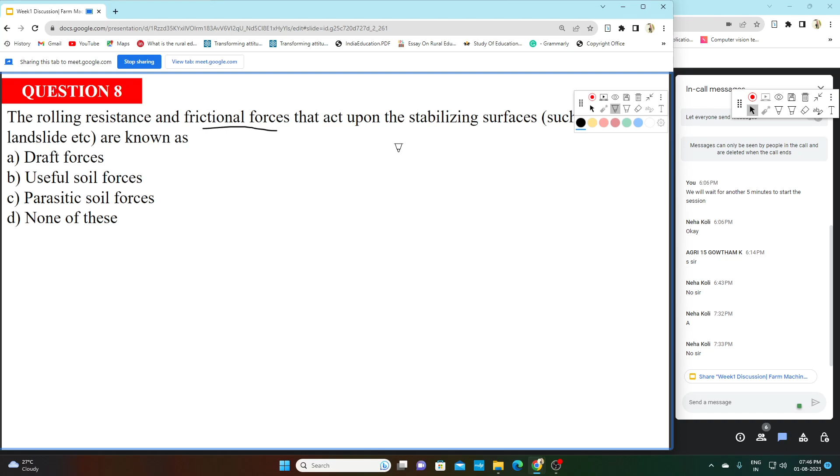I have already told you there are two types of forces used in farm machinery. One is useful forces; in the case of a moldboard, it is the cutting force. But in a moldboard there are other forces also acting, like frictional forces and the side force acting on the landslide to stabilize it. Those are not useful forces. Those forces are known as parasitic forces. So your answer will be C.

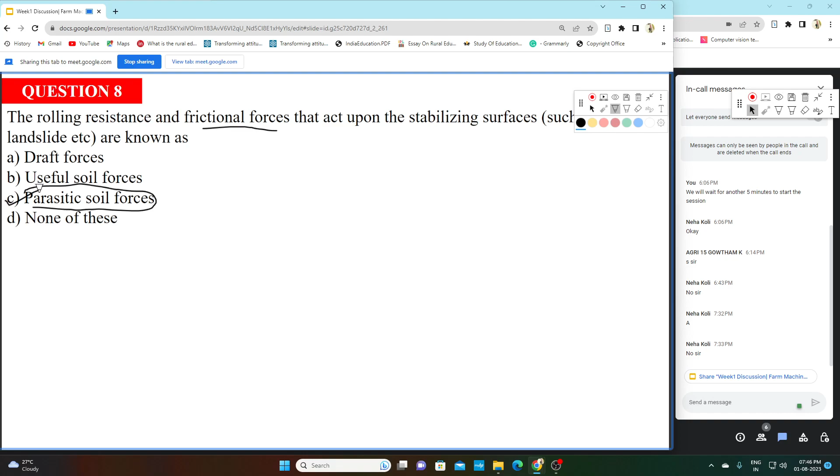So this is the theory portion written in the slide. There are two types of forces. One is useful forces, used for overcoming, cutting, breaking or moving the soil. Second is parasitic forces, like friction, rolling resistance, or other stabilizing forces. Those forces are known as parasitic forces. So your correct answer is C.

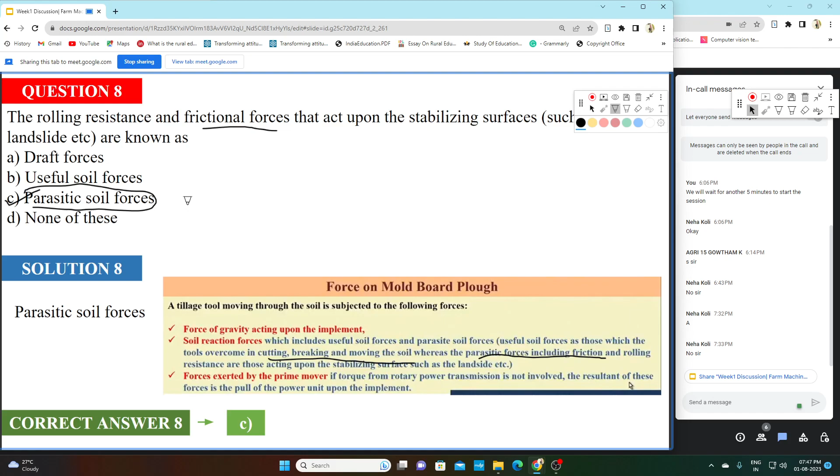Okay, Neha is also telling C. So is this clear? Yes, sir. Is this question clear? Okay, so let's move to question number 9. Again a

numerical. During a plowing operation, a two bottom moldboard plow makes a rectangular furrow shape with 30 centimeter width and 10 centimeter depth. The speed of the tractor is given as 4.5 kilometer per hour. If the soil resistance is 0.5 kilogram per centimeter square, then the power in HP required to pull the plow is given by these options. So anyone who wants to tell how to approach this question?

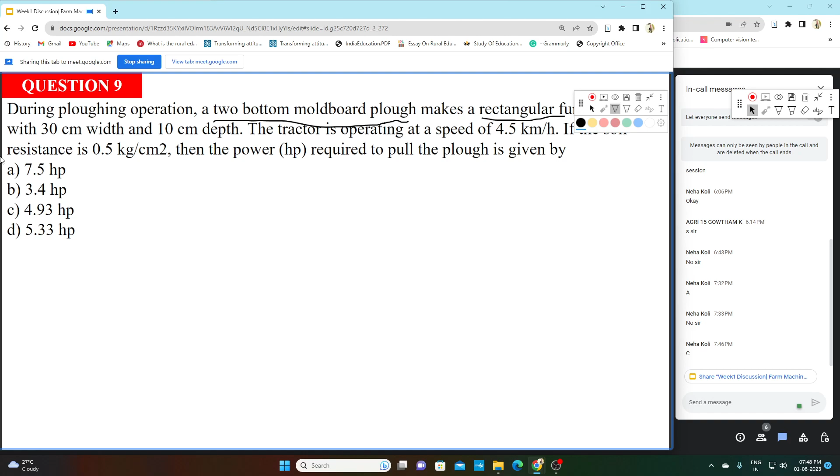Whenever you are approaching any numerical question, you first see what data is given. First, it is a two bottom moldboard plow, meaning there are two moldboards. It is making a rectangular furrow, with 30 centimeter width and 10 centimeter depth. Width is 30 and depth is 10 centimeter. This is a furrow; you can imagine it going into the screen.

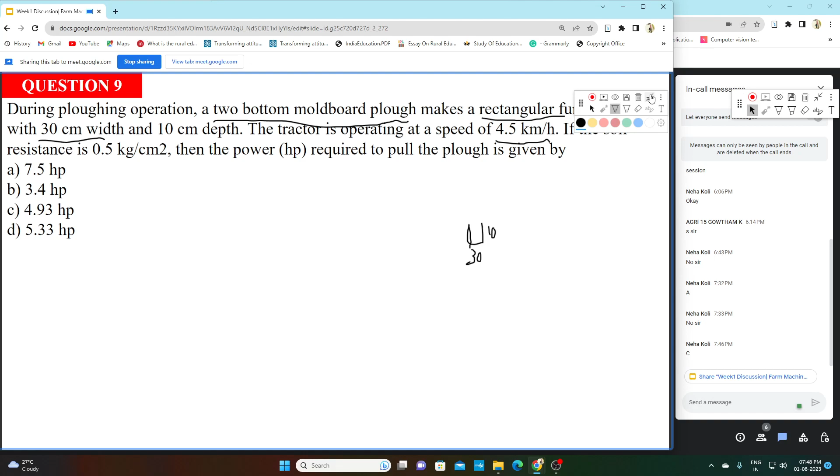Now it is given that the tractor is operating at a speed of 4.5 kilometer per hour, so the speed of the tractor is given. Then the soil resistance is given as 0.5 kilogram per centimeter square. Now it is asked: what is the power in HP?

Everyone knows the formula for power. Power is force into velocity, right? Velocity is already given, 4.5 kilometer per hour. Now if we know the force, we will get our answer. So how will we find the force? Soil resistance is given as 0.5 kg per centimeter square, so for 1 centimeter square the soil is experiencing a force of 0.5 kilogram.

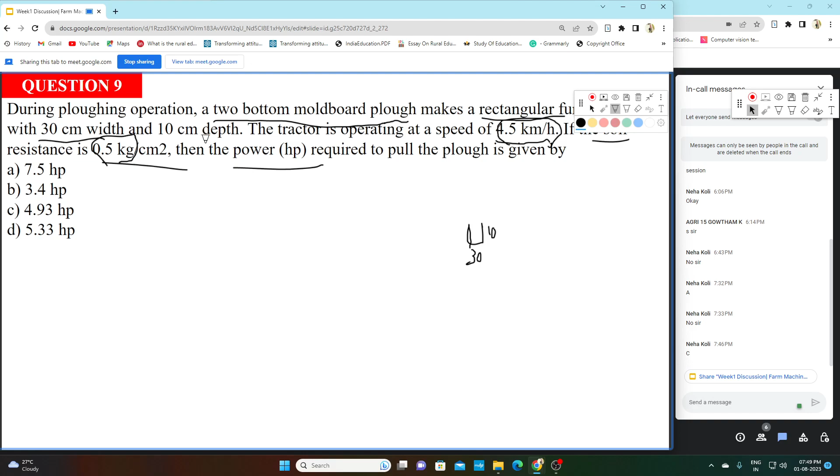So for this furrow, 30 into 10 centimeter is the furrow cross section, right? So the furrow cross section area is 300 centimeter square. And here we are talking about a two bottom moldboard plow, so we need to multiply our furrow cross section by 2. So our total furrow cross section is 600 centimeter square.

So if we multiply this 600 centimeter square with 0.5 kg per centimeter square, we will get this 300 kilogram force. Okay, and we can convert this into Newton. How can we convert this into Newton? 300 into 9.81. So we can convert any kg force to Newton by multiplying it with 9.81. So when we multiply it, we get 2943 Newton as the soil resistance, as the total draft.

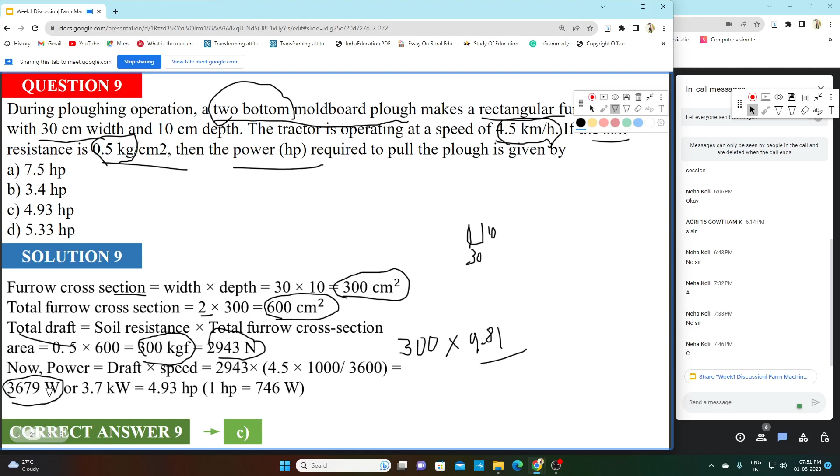Okay, now we know power is draft into speed. We have the draft, and we have the speed 4.5 kilometer per hour. As it is in kilometer per hour, we have to multiply by 1000 by 3600. So by doing this, we will get 3679 watt, or 3.7 kilowatt. But the question asks us to express this power in HP.

So I have already told you that 1 kilowatt equals 0.746, sorry, the reverse. 1 HP equals 0.746 kilowatt. So when we know how much kilowatt there is, we can divide this kilowatt by 0.746, and when we divide 3.7 by 0.746, we will get our answer in HP. So 4.93 HP is the answer. So answer C is the correct answer.

So is this clear how we have approached the question? Yes. Hello, sir. Area is calculated by 0.5 multiplied by 600? How is it calculated? Area is not calculated by 0.5. See your furrow, this is a furrow, 30 centimeter width, 10 centimeter depth. So what is the area? Rectangular area, 300 centimeter square, right?

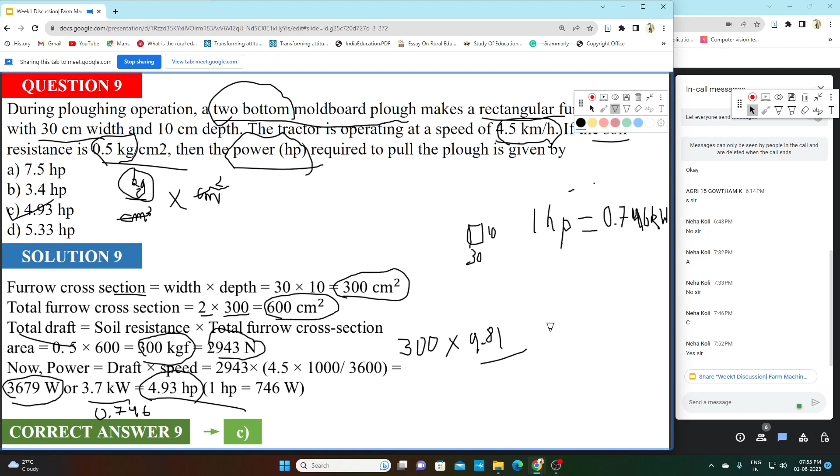Clear, sir. Okay. So I hope this question is clear to you all. This type of question can be there in your assignments. This is 746. 1 HP equals 0.746 kilowatt. So let's move on to the next question, the last question.

The bearings of gangs of the disc harrow are subjected to: A, radial load, B, thrust load, C, both. C. C for cat. Anyone else? B is thrust load. And D is none of the above. Okay, so let me tell you the answer.

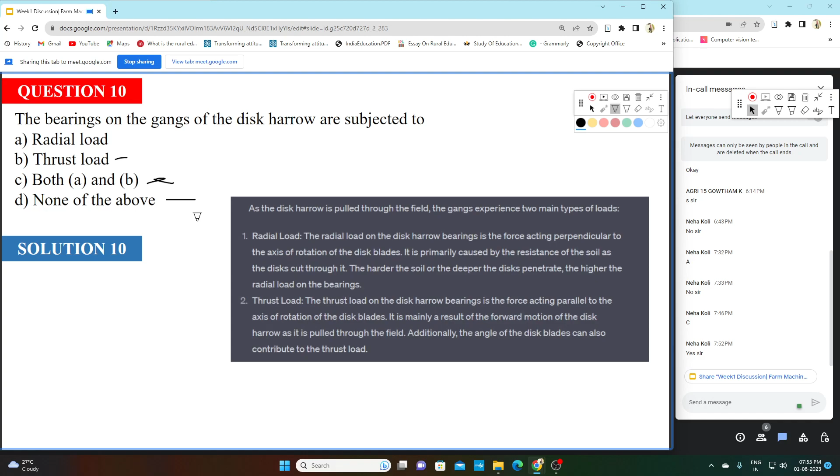So basically, when we are talking about the disc harrow, the disc in the disc harrow is subjected to two types of load. One is radial load, another one is thrust load. So what is radial load? The load that is acting on the disc at the radius. This is the radius, everyone knows what radius is. So the force that is acting towards the radius is known as radial load.

And what is thrust load? There is a force that is acting in a horizontal direction, and that type of load is known as thrust load. So this is the thrust load and this is the radial load. So why is this radial load caused? It is caused primarily by resistance of soil, because when the disc rotates, the periphery of the disc will be subjected to soil. So the soil will exert some force, and that force is known as radial load. And what is this thrust load?

The thrust load is caused because of forward motion of the disc harrow, because the disc is connected by gang, and whenever this gang is pulled by a tractor or anything, there will be a load that is coming to this gang, and because the load is coming to this gang, this load will be distributed to this disk also. So that load is known as thrust load.

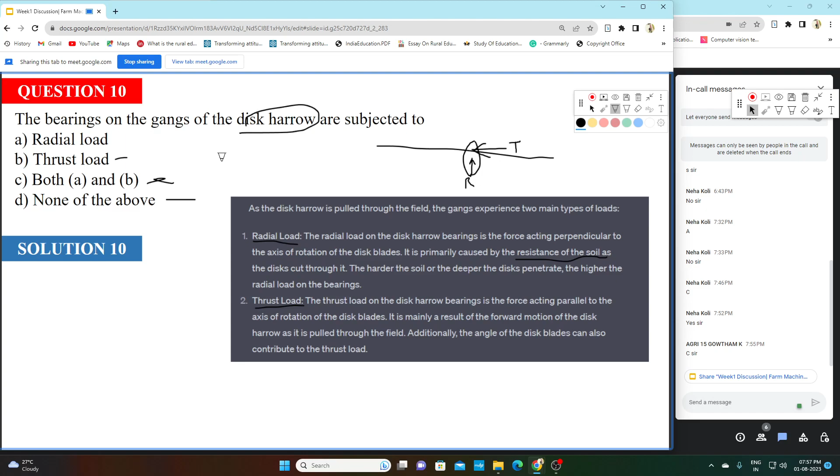So these are the two types of load that are acting on the disk. Okay, so this is the thing. Your bearing of the gang is subjected to these two types of load. Okay, so answer C is the correct answer. So is this clear?

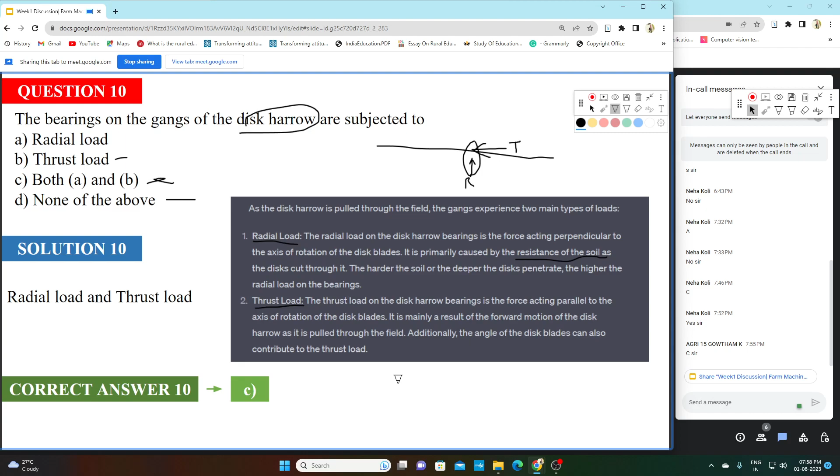Hello, am I audible? Clear, sir, clear. Yeah, yeah. So today's lecture, you got something, all of you? Yes, sir. Some portion is clear. At least you get something, right?